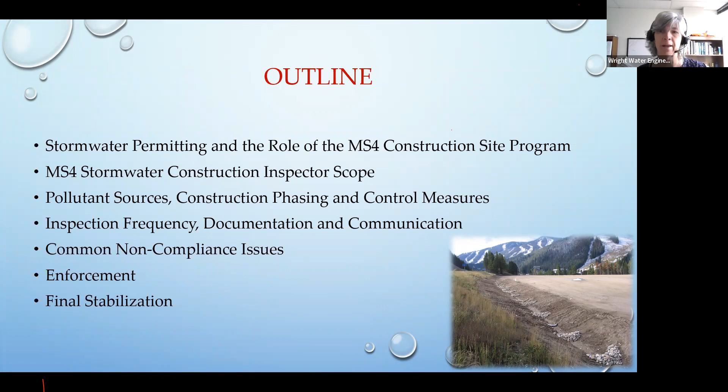I think I start with a quiz, and this is just a reminder again of what is, let me just make sure the poll was something I forgot to double check. Interesting. Okay, I did - it's so funny, the irony, right? I checked this last time and it worked just fine, and now this one is not correct.

So we can use the chat box on this. Who can tell me what are some of the scopes, the requirements, or the scope of the construction inspection oversight for the MS4 inspector? I just kind of mentioned a few things just a few minutes ago, so what are some other things?

Yeah, well, acre or more if to get the permit. But yeah, one of the pieces is that you have to evaluate all the pollutant sources, including trash. And then you have to evaluate the BMPs or the control measures.

Are they adequate? Was there a failure to implement them? Do any of them need routine inspections? I mean, routine and maintenance. And then proper installation, absolutely.

And then that last element is whether there are any discharges offsite of pollutants, right? Because you're allowed to have offsite discharges of stormwater - that's what your permits are allowing you to do. But what you're not allowed to do is have discharges with pollutants in them.

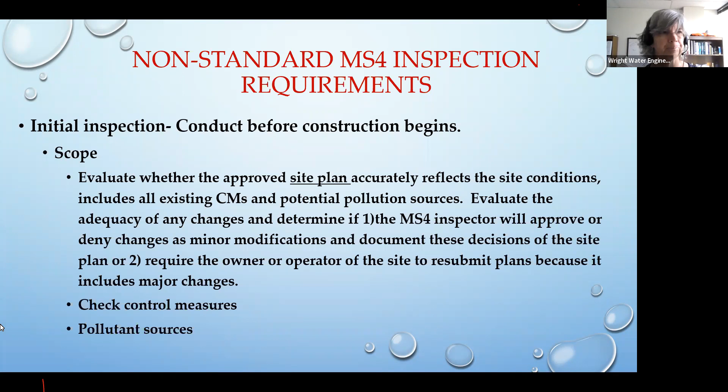Okay, back to the indicator inspections. I think use these with caution. I don't think it's terrible to use them, but I do find that people get very confused about indicator inspections. Typically, what we use them for is when we do compliance follow-up - we're kind of just focusing only on the action items that were identified in the routine inspection. So that would be considered an indicator - you wouldn't be out there re-evaluating all of the pollutant sources.

You'll want to make sure that if you're using indicator, and if you're just going out every 2 weeks but you're actually doing routine, that's fine. It's this indicator that's possibly you're not evaluating all of the site.

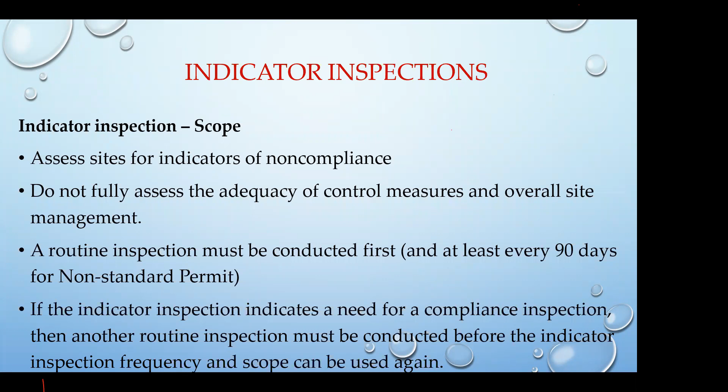I think that's a great idea too, because that's a big thing for regulators. They have to respond, not only us as representing MS4s, but also the state and EPA. They have to be responsive to public complaints. So it's really important that you can mark that differently, so that if it comes up, you can look back through, document what the complaint was, document what your observations were, and whatever corrective actions might have needed to occur after your site visit. So I think that's a really good one to point out.

And as I mentioned before we move off the indicator inspections, they don't necessarily fully assess the adequacy of all the control measures and pollutants and site management. That's why they're considered a snapshot, a very quick inspection, and why you got to be careful using them.

You can use them if you need to, but based on my experience, I almost always find at least one corrective action item at an active construction site. So it's going to push you right into a routine inspection again. So my advice is be very, very careful if you're using these, because it's very easy to be out of compliance with the permit if you're not careful.

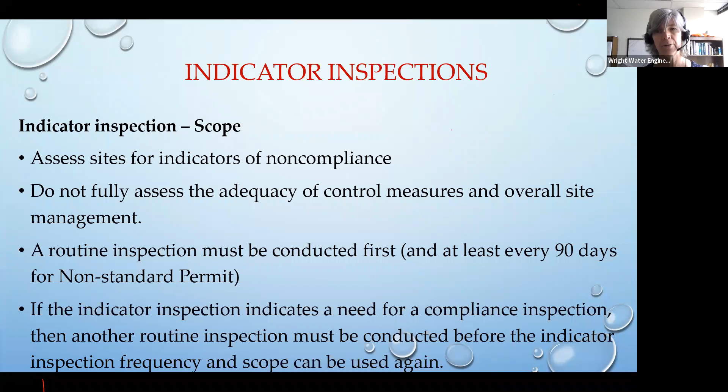So this is the other reduced inspection frequency that can happen. And as Glenda mentioned, it's really good to have your form so you can mark off the different things, like maybe construction is completed and you're waiting for vegetation reestablishment, or the site's inactive. It also can be if the site is part of what they call the Stormwater Management System Administrator Program, or CSEP. Those contractors can actually go to a reduced inspection frequency.

Now, I'm going to say this, though, that's very important. You are not required as a municipality to use a reduced inspection frequency. In fact, for most of the municipalities I've worked with, they do not do this. But the state, because these folks are part of a state-run program where the state does more oversight, is saying they can go to a reduced inspection frequency. So that's just something to think about for your municipality.

Again, you don't have to do it, but if for any reason you happen to miss an inspection on a 45-day frequency and you're evaluating whether you're out of compliance with your permit, you might want to make sure that contractor is not part of this program, because if they are, you really wouldn't be out of compliance. You just need to mark and indicate on your inspection report that they are part of the CSEP program.

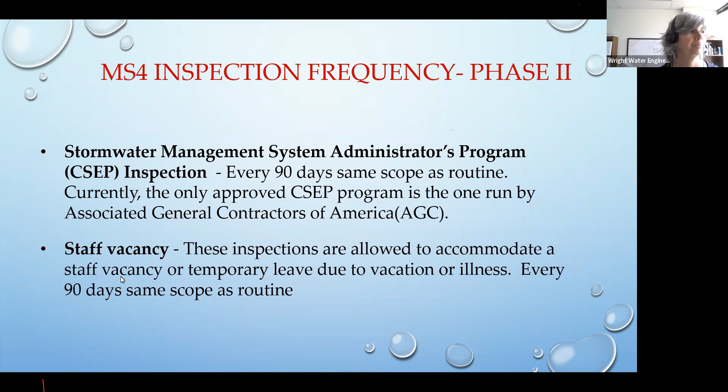So I'm wondering out there what your program's frequency is. Are you using monthly inspections? That's what I'm finding most common, is most municipalities, even though it's 45 days, they're using monthly just so they don't miss that mark. Or there are a few folks that are using 2-week frequency.

I know one municipality I'm working with right now, they typically use a month frequency for their routine inspections, but for their CIP projects, they actually use every 2 weeks with a full-blown inspection. So I'm wondering what everybody else is using out there.

30 to 45 days, depending on site. That's the other good thing, is that flexibility, right? If you have sites that are not in good shape, every 7 days is great. That's because you're a qualified local program. Although that's interesting, you probably don't have to do that. So that's really frequent, that's great.

30 days, I think, based on my experience in this class, has been the most common, 25 to 30. So if you are a municipality or school system trying to develop your program, I would say there's a reason people pick 30 days or more frequent versus the 45.

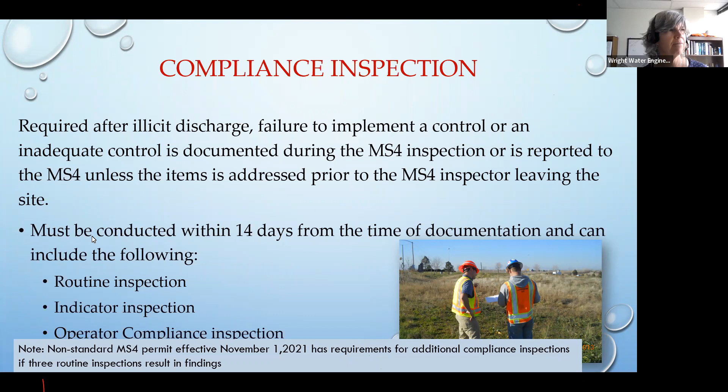What's hard about that is if you have 3 of these apparently in a row with your inspections under the non-standard permit, you actually have to move to a 14-day frequency on your inspections. Let me see if I have this somewhere - I feel like it's here, but not here. But we'll go back to that. I have a whole slide on it, but I'd love to get some thoughts from other people too - just make sure you're all aware of that, because that would change things for those of you doing 30-day inspections.

That would make a lot of your sites probably become 14-day inspections, although it sounds like not for very long, and we'll get into the details of when you can switch back to your normal routine schedule. But before we do, let's talk about operator compliance inspections.

You can either do your compliance follow-up inspections in person, or you can ask the contractor or operator to send photos to you. Some people use forms for this. It works really well if you're in a community that has a lot of contractors who hire third-party vendors who are experienced, have software like Adobe, and are able to take photos with iPads, Surface Pro, or tablets and put them into this type of form, or at least manually input the pictures into the form.

Where it doesn't work very well is when you're dealing with custom home builders or other contractors where computer things just aren't their thing. So they're more likely to just send you photos. That's fine, but you have to have a way to document it in your system. That report has to include the photos, the contractor's name, and a date of when things were fixed. Just be aware of this, and you may need to have multiple options in your municipality.

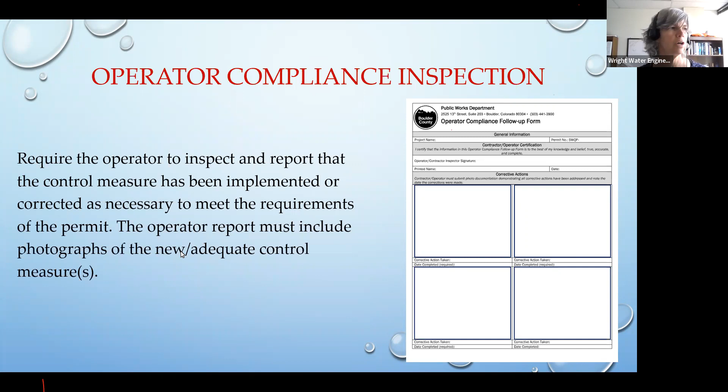Okay, here's that slide I promised you for the non-standard permit. If there are 3 consecutive routine inspections that require compliance inspections - meaning there were either inadequate control measures, failure to implement, or a discharge - if you have 3 of those in a row, then you have to go to a 14-day inspection frequency. The interesting part, which makes this seem more palatable, is that you only have to do that 14-day frequency until the site no longer has an illicit discharge, which maybe it never had to begin with - you don't want to have an illicit discharge.

Of course, you wouldn't let that keep happening, or that the failure to implement the control measure is resulting in an increase of discharge of pollutants. And this is different, right? This is an actual increase in discharge, not potential. And then the third caveat, as long as the site is no longer having inadequate control measures resulting in an increased discharge of pollutant.

So this doesn't, to me... this is where I think we'd want clarification, although I don't know, maybe you don't want clarification. To me, this says that unless the site is actually discharging and having an increased discharge of pollutant, you can get out of that 14-day frequency pretty quickly. And honestly, I think a lot of the compliance follow-up items we're looking at often aren't an actual discharge, nor are they causing an increased discharge of pollutant. They're just a potential. So I don't know what anybody else's thought is on this, I'm kind of curious.

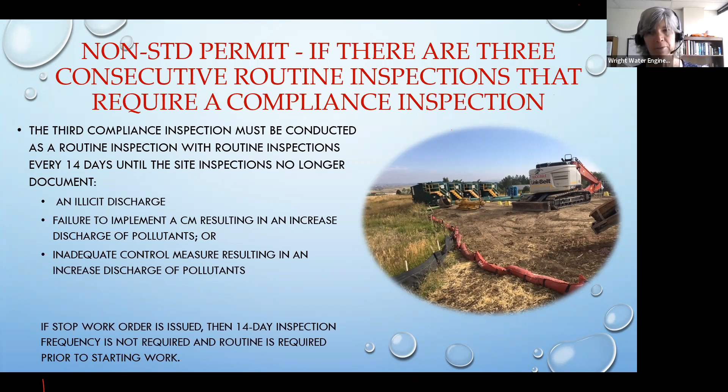But do know this is out there. And the reason I think this is because of the stop work language they start talking about. So to me, I think they're trying to say as enforcement occurs, you're going out there every 14 days, which most of us are going out way more frequently than that if we're in enforcement.

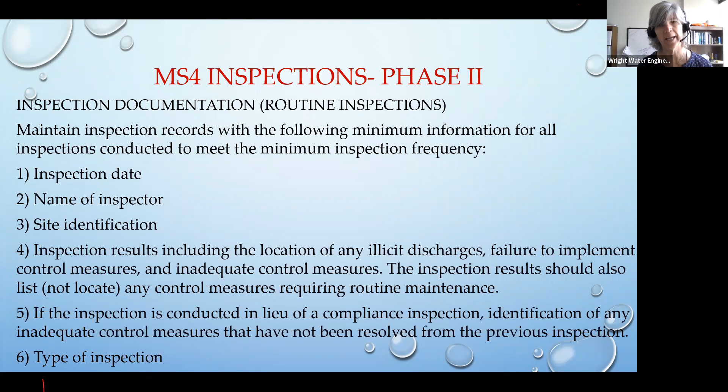And then the type of inspection, again, whether it's routine, indicator, or reduced. And I like what Glenda said, as well as providing maybe a little more detail, especially for reduced, because there are many different reasons why it could be reduced. And also, I think someone else said, if it's a citizen complaint, it's really good to be able to indicate that type of inspection.

So this is just an example—I think I happen to have Castle Pines on here. In this one, we mark down the project name, the address. We actually do list the CDPS permit number, which is that number from the state, under the Colorado Discharge Permit System. We put in that number because we just want to make sure that they had that permit.

You could also just have this as a checkbox as something you review as part of your review. You also aren't required to have it, so this is not a required item. It's more of just if your municipality or organization believes that they want to check if there is coverage for permits that are required to have coverage under that system, that they have it. But again, that's kind of an optional thing.

We have the date of inspection, we have the project contractor information. In the city of Castle Pines, as well as Douglas County, and I believe Parker, we have site managers. So that's written in there—who that person is and their contact information.

And then you want to put in some kind of frequency—you can call it frequency also. As Glenda was talking about for routine, we have that here, but then for the reduced, we have a circle to indicate which one it's supposed to be for, whether it's an inactive site, part of the stormwater management program, or a staff vacancy.

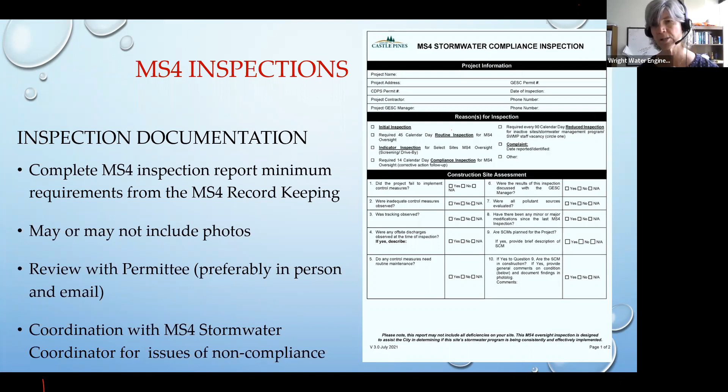It's much better to have those conversations early in the game than to all of a sudden at the 11th hour when you want to issue a stop work order have that conversation. Again, if you're the MS4 stormwater coordinator, then you know who you need to be talking to, but this would really be for inspectors that are not holding that position. You just want to make sure you're communicating within your organization too about some of these sites.

This is just a blow up of what we already talked about, making sure that you do mark the frequencies. As someone mentioned, complaint - we have that marked off here too, because that's really important to identify. And we actually have the other category too. There are times that you might want to use the other.

For example, if you are aware of an inspection happening at a nearby site by a regulatory agency, maybe you want to go out to that site that they're going to be inspecting, and maybe even some of the sites nearby. For whatever reason, you can always mark other and then put in here why you went out.

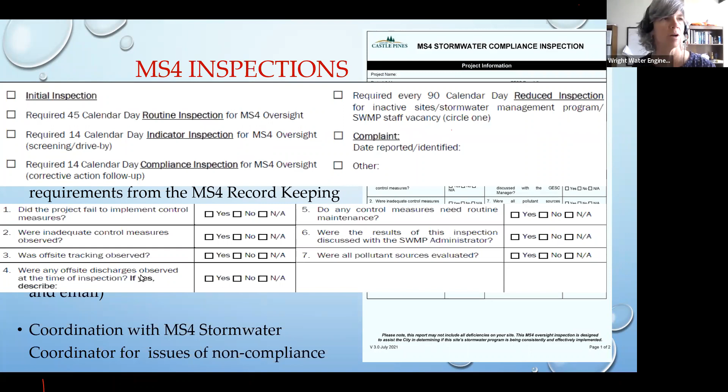This is also a blow up of just that having checkbox for failure to implement, inadequate. This one happens to have offsite tracking, but you don't have to have that per the permit - that was just added to this one because it was important for this group. And then were offsite discharges observed - that's required, right? That's that illicit discharge, they're calling it, even though it's more of an offsite discharge.

And then routine maintenance. And then here, this is optional, and this could be GESC manager or SWMP administrator - were the results discussed? Sometimes it's helpful to know that, because it's helpful to know, like, hey, did you meet with them on site and talk to them about this?

And if you continue to not have a response, I think it shows that you had these verbal communications that occurred. I highly recommend for everyone, if you don't have this on your form, to put in: were all the pollutant sources evaluated? Because remember, that's a requirement of the permit. But there might be times where the answer is no.

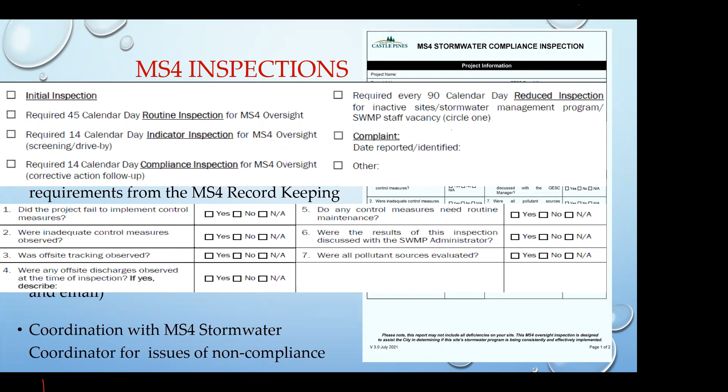So when do you think we would ever check off that we didn't evaluate all of the pollutant sources? Can anybody think of some times they might check that? If you're doing a compliance follow-up inspection and only looking at those items that were out of compliance at the last inspection - yeah, absolutely. So if you're doing a compliance follow-up inspection and not doing a routine of the whole entire site - maybe that's your program, but if your program only really requires you to look at the items that were outstanding or in non-compliance during your last inspection, then you're going to check off no. You might want to even put in a little description: this was a follow-up inspection, only outstanding items were evaluated.

The other one someone mentioned is snow cover. If it's covered in snow, you can't possibly be evaluating all the pollutant sources, so it's okay to check no. Sometimes we get a mindset that we have to always be checking yes for these type of questions, and there are times where the answer is no - it's snow covered, snow obstructed, maybe too muddy and you couldn't get in. To get into the site you would have had to drag out a bunch of mud with you, and maybe it just wasn't very feasible to walk it. So whatever it is, make sure you just document it. This is the big take-home from this class: communication and documentation. So make sure you document it.

The other thing is, if you happen to have a complaint and the complaint was really centered around some specific item, you might only go out and look at that specific item. So all good reasons for not evaluating all of the pollutant sources. Oh, the other one is if you're doing an indicator inspection - if you checked off that it's an indicator inspection, then you would also want to check off no, not all pollutants were evaluated. And that's okay, because it doesn't require you to evaluate all of them if you're doing that type of inspection.

So speaking of communication, we're going to dive into this for a couple of slides. As I mentioned, big take-homes from this class are communication and documentation. And the communication is not just with the permittees, although most of these slides are going to be about that - it's also about communicating with your group and within your organization. I mentioned on the last slide that if you're starting to have a problem with a site, especially if you're an inspector that has an MS4 stormwater coordinator as your supervisor, you're going to want to make sure to give them the heads up.

Or also if it's a CIP project, you're going to want to reach out to the CIP managers and say, I'm really struggling with this project, we don't seem to be understanding what compliance is - is there a way we can have a meeting together, either just internally first and then with the contractor, or how do you want to handle this? Because they play a really big role in those CIP projects. And again, you just don't want to wait till the last minute and say, you know what, I want to stop work on this project, and then have the CIP manager or even the MS4 coordinator say, well, I had no idea you were even having problems with it. So you want to have those communications early in the process.

Also, when you're working with the contractor, you want to be very careful about directing the contractor. This is super easy for all of us to do. We really want to be careful about this - sometimes there are times you can direct the contractor, especially if they really don't seem to understand stormwater compliance, but you want to be careful. Because really your role is to identify non-compliance to them, and they need to then respond and fix it. Your role is not necessarily to create a plan for their project that would meet the expectations.

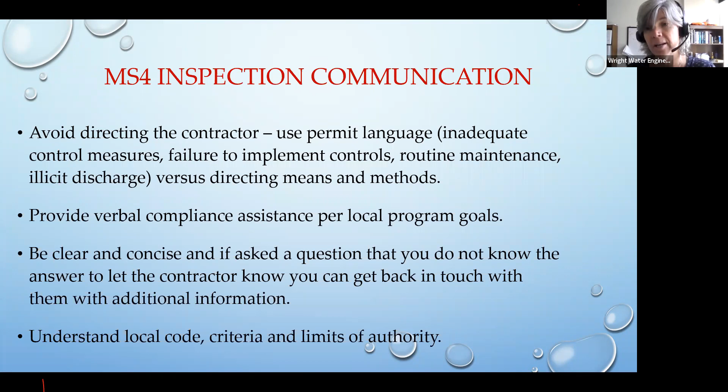We all try to be pleasant, though we have days where we're more pleasant than others. It's hard because some contractors might push your buttons, especially if you've had a lot of dealings with them. You have to remember that this is your job and you are a professional, and you expect to be treated like a professional too by the contractor.

You can say something like, I feel like this conversation is heading in a direction where it's no longer a professional conversation, and I think we need to table it and come back when we can both speak to this in a professional manner.

What you don't want to do is risk your job. It gets risky when you start being manipulated by the contractor and react in a way you wouldn't normally. It's okay to get a tiny bit bristly, but you have to be careful not to go somewhere that doesn't show your professional side. Keep that in mind.

If you feel like you need to leave, you can always do that. If you're in the middle of a conversation and can see it's not going anywhere, I highly recommend tabling that part of the conversation if you have other items to talk about.

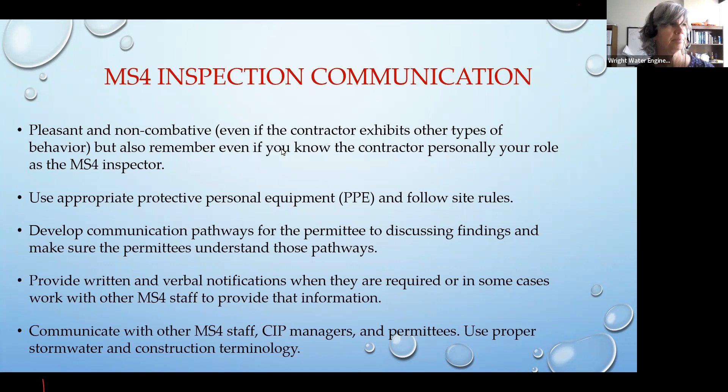This is Steve Matakowski from Mile High Flood District. This clip is really short—we had two clips, one used for the CIP training, but this one gets into communication. Make sure you're communicating, because agencies like Mile High could come into your municipality and be working, and they just want that communication. Some of them really want to walk the site with you. I know it's not always easy and you don't have a lot of time, but I recommend for permittees that want to walk the site with you, if you're easily able to coordinate, give them that opportunity, especially the first couple times, because it can be really helpful for them to understand what you're looking for out there.

Welcome, I'm here with Steve Matakowski with Urban Drainage at Sanderson Gulch Project to talk about stormwater compliance during construction. This class, given through the Colorado Stormwater Council, is geared towards our MS4 inspectors. I'm wondering what advice you might give them when inspecting an urban drainage project, what things to make sure are in place, and some of the communication they might want to have with the urban drainage folks as well as contractors, and how your program is set up.

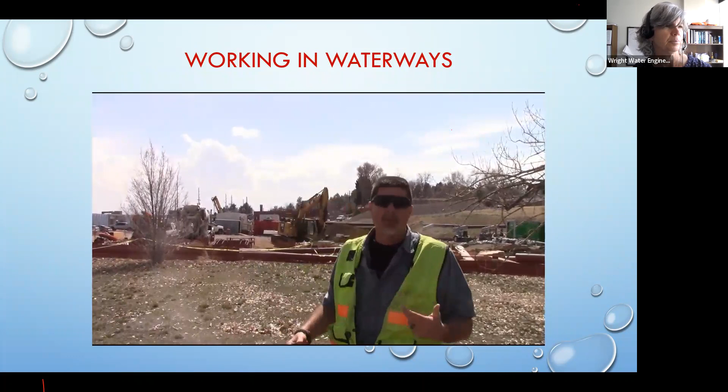I would say first and foremost, be gentle with us. Really, communication's a big part of what we try to do—effective communication, good communication, developing really good partnerships. We look at those MS4s as our partners in this. So early communication, making sure communication happens often, appropriate site visits, and really helping us stay ahead of whatever the needs are from that MS4 compliance portion of the project would be really important. We are always committed to effective erosion control and trying to protect the environment as much as possible. Obviously on a big project site there's disturbance, but we want to do our best to minimize those impacts.

So again, I think Steve really echoes what a lot of people feel, although there are some contractors that aren't trying as hard—this is before Urban Drainage became rebranded as Mile High. Especially when you have other governmental or quasi-governmental projects come through—I just worked on a big water line, and they want to try to be on top of it, but their contractor wasn't always. This is where we made sure I wasn't having a conversation just with the contractor, I had it also with the water line company. It's really important to do that communication, and I'd say early in the process, just like Steve was saying, don't wait until even the notice of violation—let's talk about this before we get to a stop work order. And if we get to the stop work order, if that's where it has to go, great, but let's communicate to make sure everybody's aware that's where it's headed.

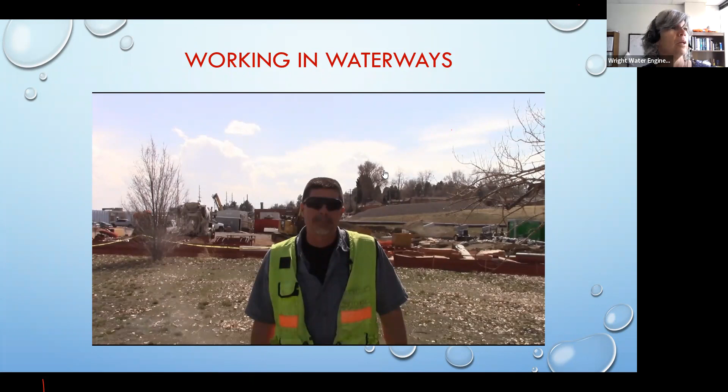I also have an inspector video, and this is a little cheesy for some of us, but the idea here is just to make sure when you're doing those initial inspections or pre-construction that you are communicating effectively to the permittee. This is why I'm a big proponent of these initial inspections, and a proponent of MS4 giving a spiel, talking about their expectations and introducing themselves. Because if you come out of left field and no one knows who you are, you're not going to get nearly as much leverage as you would if you set the stage to begin with.

Hi, nice to meet you. I will be your MS4 inspector during this construction project. I will be coming on site for a routine stormwater inspection at least every 45 days. Are you the qualified stormwater manager for this project?

Great. What I would like to do now is go over the initial inspection kickoff agenda. This will cover what you can expect from me and what I expect from you. Like I said, I will be coming out on site at least every 45 days for a routine inspection. During my routine inspection, if I find the site out of compliance, I will ask you to address the findings and respond with an operator compliance follow-up form. If I do not receive an operator compliance form within the allotted time frame, I will have to come back on site for a compliance follow-up inspection. Does all that make sense?

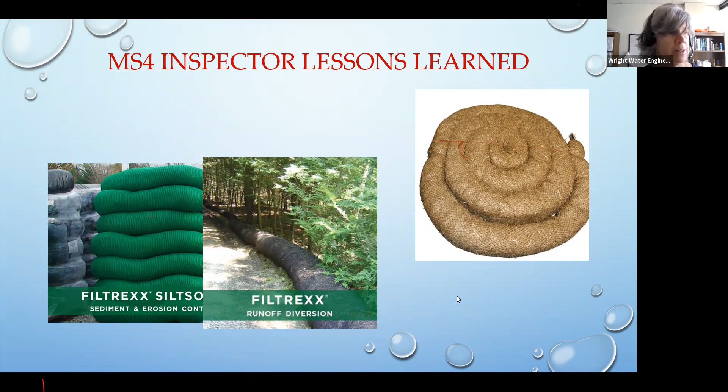All right, so documentation. As I mentioned in my story, and I think in Glenda's also, you need to have that documentation to back up what you're saying. So thank goodness I had put in the inspection report that they needed to verify which product they were using. I did also put, though, if it was a compost log, to use the X staking, but that's okay. That's what still saved me.

Had I not documented that verbal conversation, it might have been harder in the end to defuse what was happening. So I highly recommend documenting as much as possible, even some of the verbal communications. For example, those minor modifications.

You know, if the contractor says, hey, I want to use a Dandy product instead of the inlet protection I said I was going to use, and you say, oh, that's fine, go ahead and put that in the notes section or comments section in your software, wherever is appropriate for your program. But mark down, on May 18th, gave permission to use Dandy products for inlets. That way it's documented very nicely.

Or had a conversation with the contractor explaining they were not allowed to use Dandy products, because that might be the case too. So whatever the outcome is, go ahead and document it. The notes section is a great place in your inspection reports.

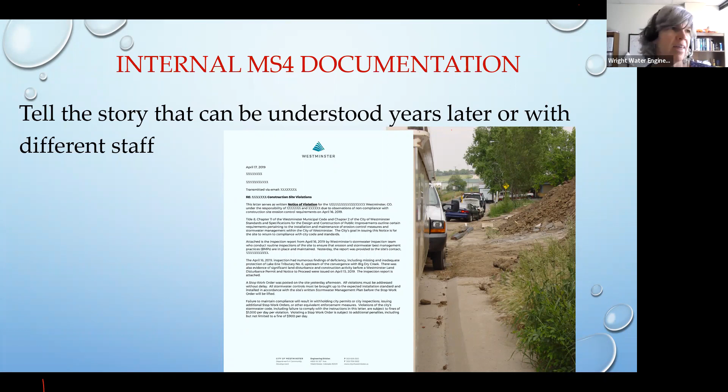All right, if a contractor asks how much silt fence they need to order to be in compliance, you should - and actually this is a true story, folks - what do you think there? I'm not gonna read all of them, but I'll let you read through them and pick.

This is a great time to show you this feature. Some of you have Zoom, where on your toolbar there's an annotate button with a little pencil icon. Some of you might have it as a view button - if you drop it down you get your annotate option, which looks like a little pencil, and you're able to draw. So this is me up here. We're gonna use this in just a little bit too. I can't draw very well with it, but you can also put text in.

Yeah. I know, I agree with you, Martha.

Sometimes I want to do A, right? You just want to be like - and the thing is, this person was actually, it wasn't a contractor, it was an HOA, which you gotta remember. And even with contractors, sometimes you think someone's trying to be a smart aleck, and then you realize no, they're actually being super serious. Like they really just don't understand the process. So you got to be respectful.

And this is what we did. We said, look, you're going to have to go back and either get your vendor - though most of the time the vendors aren't going to come out and measure it, unless you're hiring a third party and the installer comes out to measure it. Or you're going to have to go back to the plan set and have them measure it out, or look for a scale bar and measure it out yourself. But this is a true story - sometimes you can't make these things up.

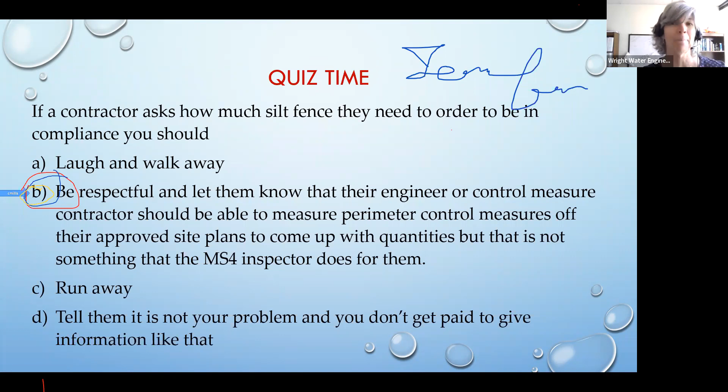So yeah, good job everybody, you want to be respectful. It took me a minute, actually - I was sort of like, are they serious? And they were very serious. They just had no idea, they really didn't know where to start. So just remember, sometimes people really are trying, but they just don't understand the process, or they don't even know where to begin.

I worked with a municipality that had issues with a site, and they ended up telling the site - because the contractor honestly didn't understand control measures, and they were always installing their own without understanding how, and didn't understand the expectations for compliance - that municipality required, and we can all do this, that they identify a qualified stormwater manager, or whatever your program calls it. That person is supposed to be knowledgeable in stormwater practices, and if that person doesn't exist, you can require they hire a third party that meets those requirements. That's what this municipality did, and that contractor ended up having to hire a third party to come out and do the stormwater inspections and installs.

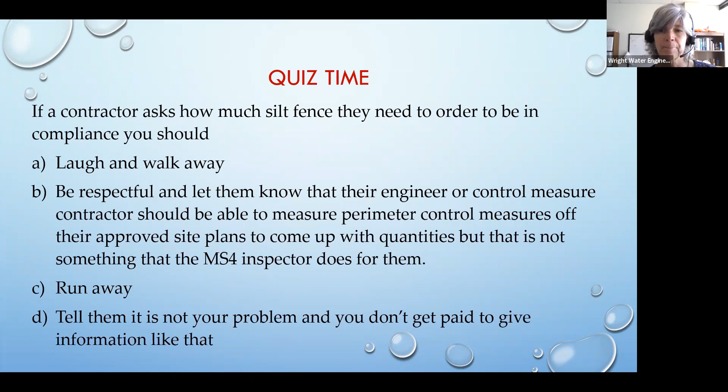All right, yay, fun game time. We're gonna go ahead and do the game time, and then we'll take a break after that. So this is my little Jeopardy - I actually just created one for the CIP class, and I think they're super fun. So let me go ahead and run this.

And how we're gonna run it is, if we were in person we might do teams - that's how I initially was doing it. But since we're not, what we're gonna do is I'll pick someone to lead us off, and after that person picks the category, the first person to answer - it can be in the chat or unmuting - the first person to answer, they'll pick the next one.

So the categories that we have today are control measure FAQs, inspection permit knowledge, regulatory requirements, challenging situations, which is kind of tough because it's often a little bit of a long answer, but that's okay. If we even get close, you get it right. Enforcement 101. All right, why don't we go with Andrew Rippey, because he's got an A and he's one of the first ones listed in my participant list.

Do you want to pick one here? Sure, let's do inspection permit knowledge for 200. All right. Name 3 items that must be assessed as part of the routine inspection. And that's for anybody to answer.

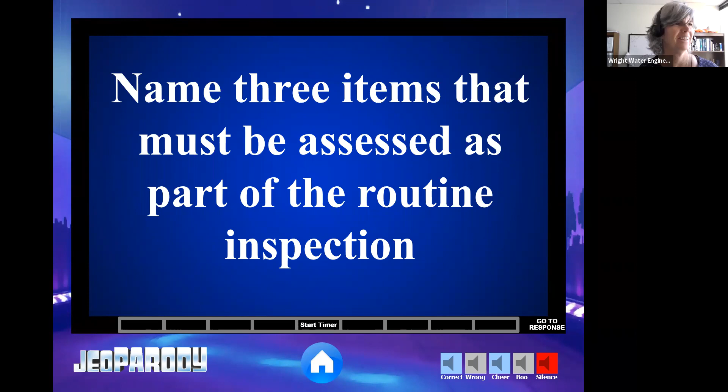This is Glenda. So all pollutant sources, all illicit or offsite discharge locations, and oh geez, now I'm drawing a blank. What about CMs? Oh yeah, and installation of control measures. Yeah, right, absolutely. Brain cramp. I know, that happens to me sometimes when I'm teaching too. I'm like, I knew what I was going to say and I've totally forgotten. But yes,

So you have to, the bottom two are the first two that Glenda started with, the illicit discharge and evaluating all pollutant sources. And then with the control measures, there's actually a couple different items within there. You have to identify if there's a failure to implement, inadequate, or if there's routine maintenance. And even though routine maintenance doesn't trigger a compliance follow-up, it is still required that you identify routine maintenance during your inspection. So good job.

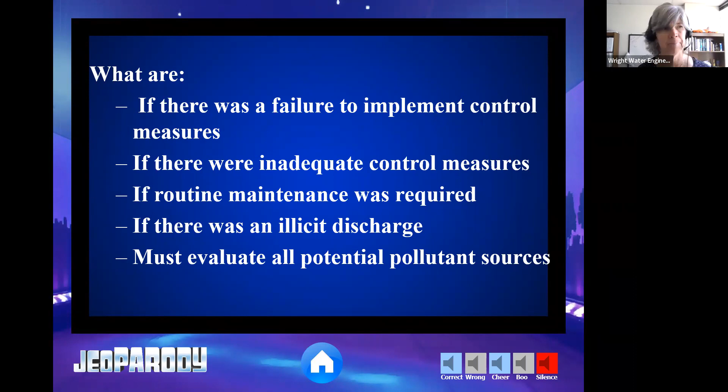All right, Glenda, you want to pick the next one? How about control measure FAQs for 300? Maximum upgradient disturbed area per every 100 foot of sediment control without another control measure in place. So this is the drainage, upgradient drainage draining to the perimeter control. What's the maximum allowed? Anybody know? So 1/4 acre.

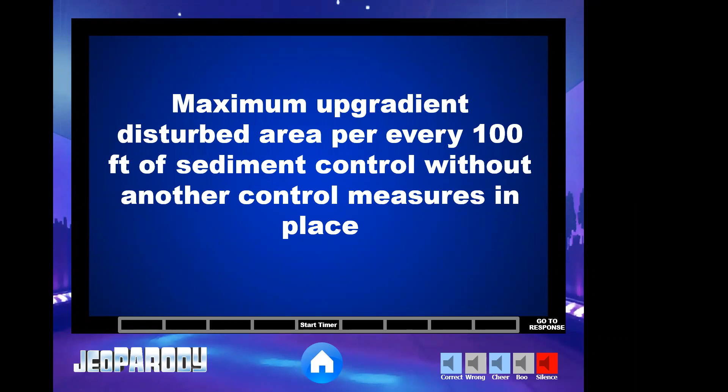1/4 acre, yay. All right, Ashley, if I can get back. What do you want to pick there? Let's do regulatory requirements for 500. All right, going for the big bucks.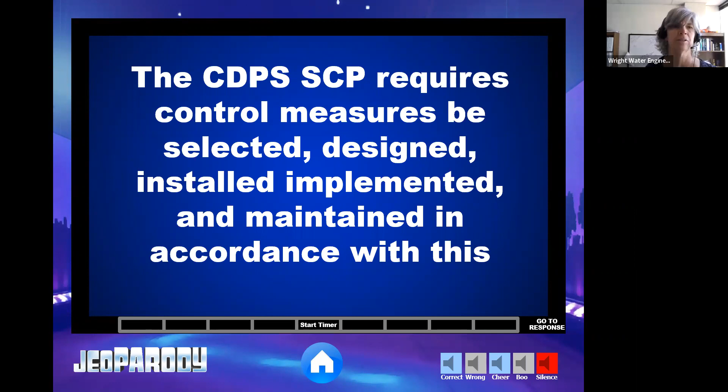So the SCP requires control measures to be selected, designed, installed, implemented, and maintained in accordance with this. It's my favorite phrase. Yeah, the site plan is true too. So what are good engineering, hydrological, and pollution prevention practices? Yes, that's the answer we're looking for. I do agree with everyone that had SWMP and site plan. The SWMP itself has to be designed with good engineering, hydrologic, and pollution prevention practices.

So just remember, if you as an inspector have a contractor, and I've definitely had this happen, show me where it says I have to do this. You can say, it says it has to be designed with good engineering, hydrologic, and pollution prevention practices. And what I'm seeing here does not meet that criteria. It's as easy as that.

So I know the first time that happened to me, I was scrambling. I was like, oh my gosh, I don't know that. So I had a contractor who seeded, broadcast seeded, and did not put any kind of cover on it. And they were like, show me where it says I have to put a cover. And I was like, oh my gosh, where would I find that it specifically within the MS4 regulation says that? So I was like, you know what, it's standard practice, right? And so I use this good engineering, hydrologic, and pollution prevention practices. So very helpful to use.

I agree with everyone that had site plan and SWMP. Those are also designed with this, but all the control measures, as well as the site plan, as well as the SWMP, all have to meet this requirement. All right, and I'm so sorry, because now I've forgotten who said that. It was Glenda. Okay, great. Glenda, you want to pick again?

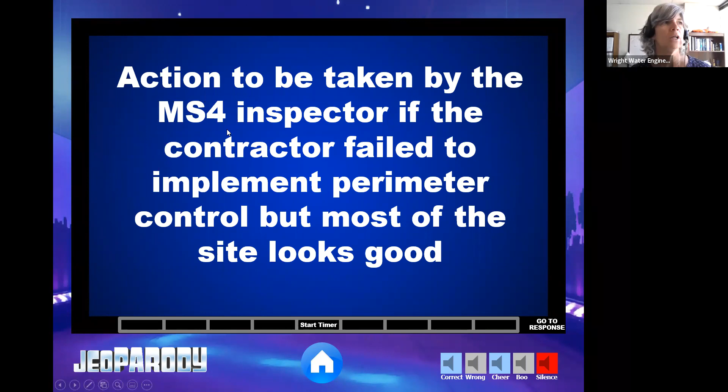They failed the inspection. Yeah, they do. You know, look, I had an inspector once that was one of our staff here at Wright Water, and they're like, well, it looks so good, you know, and I didn't want to be discouraging. And I was like, no, you cannot, they failed. I mean, and you can absolutely in your inspection report, put a note that most of the rest of the site looked really good, but you still have to document that they failed on that aspect.

And I often do tell a site that looks really good and they just have one little issue. Hey, overall, the site looked really good. However, there is a deficiency, so I need you to fix that. It's going to be on the report. So that's absolutely right.

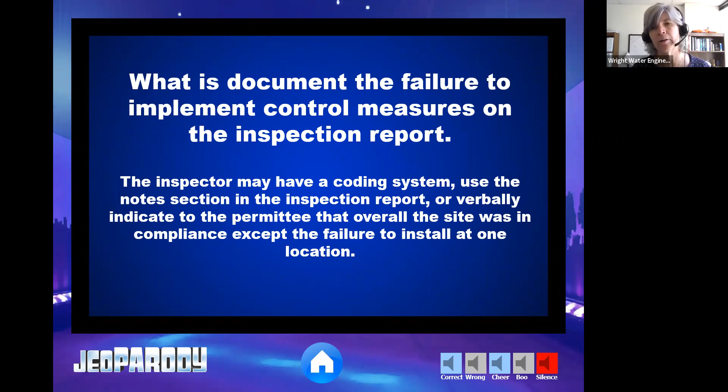All right, Joe, what do you want to pick? Enforcement 101 for 500.

All right, we're going for another big one. I can't remember this one either. Tool to ensure that permanent control measures are built per design. Oh, this one's actually kind of easy.

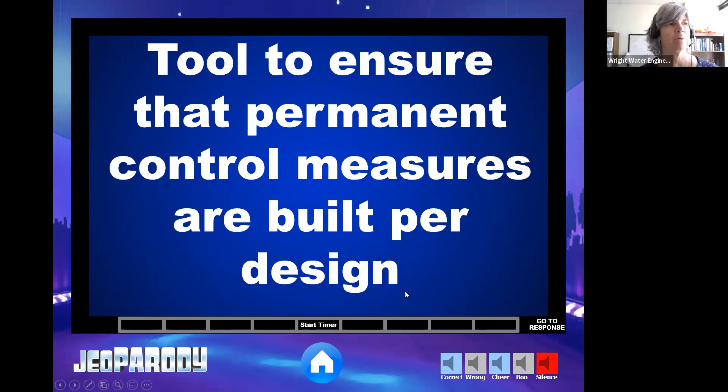What do we have to require now? It's a detail, and even more information than a typical detail. It's an as-built, right? So it's an as-built detail that shows what was built out there, and that then has to be compared to the original design plans. Some municipalities even require a statement that says this was built per the approved plan, or built per the approved plan with the exceptions listed below. The idea is that those exceptions hopefully were very minor.

This one's a little tricky, I have to decide if I'm going to keep this one in. We don't really talk about permanent water quality control measures in this class as much, but do know, as I mentioned last week when we were talking about sediment basins, that potentially we're going to be extending into detention basins later, you do need to make sure you are observing the construction of that permanent feature, at least marking notes in your inspection report if you don't have a separate checkbox item or form for that. That's something also to watch on this Phase 2 renewal, to see what language is going to be in the renewal process.

Let's see, I'll just pick somebody else since that one was a tough one. Sorry, I'm just looking for a name. How about Chancey?

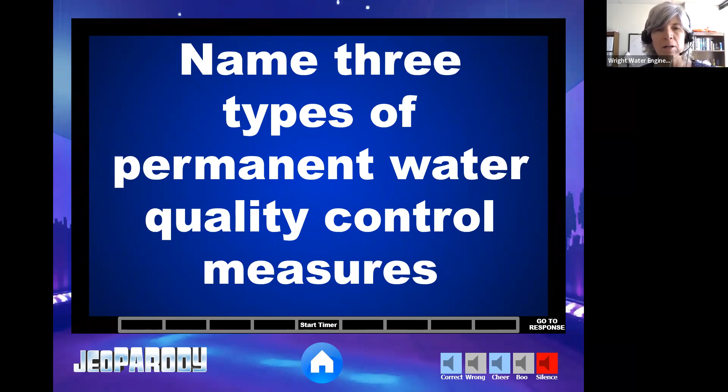It is really important as MS4 inspectors, even though you're doing mostly construction, that you need to be familiar with what our permanent stormwater control measures are. EDB, sand filter basin, and grass swale. Yeah, those are good ones. So we've got the EDB, most commonly used.

I will tell you, with the draft EDB that's out from Mile High Flood District, they are no longer recommending EDBs used for drainage areas that are less than 5 acres. So I think we're going to be seeing a lot more bioretention and infiltration type swales and stuff. Yeah, we've got rain garden, permeable pavers, StormTech, those underground stormwater facilities, absolutely.

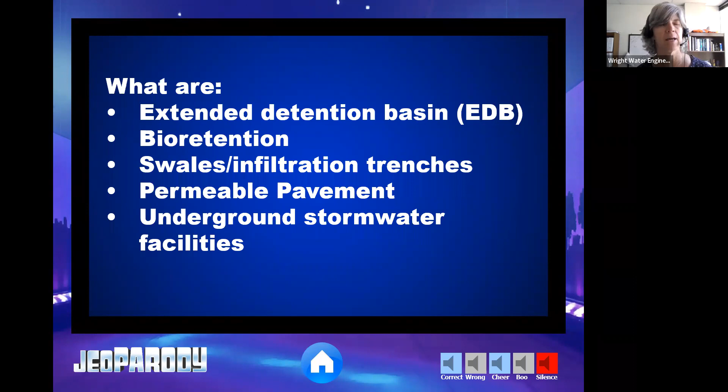All right, we're going to do one more. I think, Joe, I think that was you. Yeah.

Inspection permit knowledge for 500. All right, let's see what we put in here. Oh yeah, this one's kind of tough, although this is one that does affect for sure Castle Pines. 4 requirements for individual homes that were part of a bigger, common plan of development, to be excluded from MS4 oversight inspections per the MS4 permit. And I think this is also in the SCP permit, or portions of it are in the SCP, not all of it.

Yep, someone's got less than an acre. That's right, so that's one of them. How about? Sold to the homeowner. Yep, sold to the homeowner. Yep, taken out of the SWMP. So the permittee needs to mark down that that's been taken out.

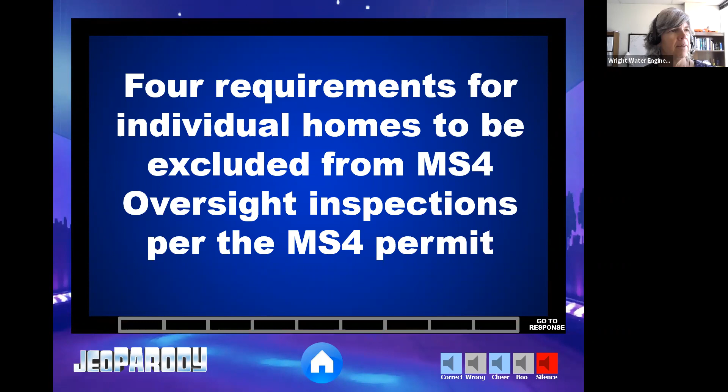So if that developer got a big overlot grading permit, in order for those lots to be taken out, either the overlot grading permit has to be in place still, or the builder has other lots that are still active and they still have a permit for the area. But someone needs to have an overall permit for the area still for where the lot is located. Now, if it's the last lot that's stabilized, then you could close out the whole permit, assuming everything outside of the lot has reached final stabilization.

Any questions on that?

I had a custom home builder who wanted to get out of their permit, but the problem is they weren't part of a common plan of development, so there was no residential over-lot permit being held by the builder, because it was only for one lot and it had to do with proximity to waterways—that's the only reason it was permitted. But I couldn't let them out. I said they either needed to hold on to the permit or it had to be transferred to the homeowner, because apparently the homeowner was doing all the landscaping. But in that case, you can't close it because there is no overlot type of permit overseeing that area in general.

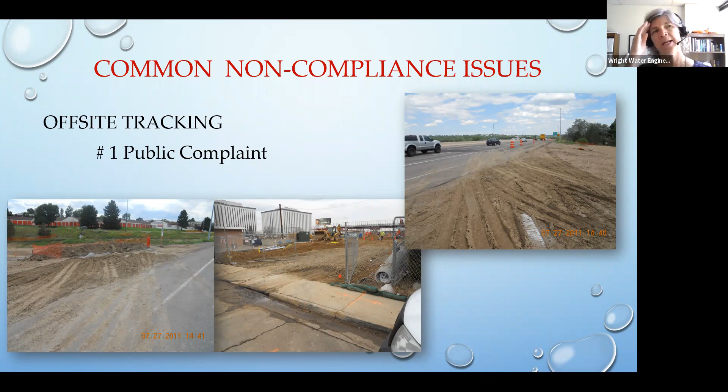So the number one complaint—yeah, no problem. And if you need to watch this recording afterwards, that's fine. Just let me know that you finished it, and I'll get you the exam, then we'll get you the certification. But yeah, go ahead and start marking these things up—you can do things like here, yep, got issues.

Great job. I would agree—on this top, upper right-hand side, we don't just have tracking, right? We've got tracking out to the pavement, and we've got no control measure in place. And can you just say 'I'm sweeping'? Is it okay to say, oh, I'm not going to put in any vehicle tracking control because I've just decided to sweep instead? No, no. And you hear that all the time—I just heard it the other day from someone, and I said, no, I'm sorry, that is not adequate.

So you must have some kind of tracking control pad. And in this case, there's no funneling onto that pad—it's sort of a free-for-all, anywhere you wanted to exit out of the site. So the number one complaint you'll get from the public is sediment tracking, especially when big clods of mud get tracked out. We haven't had rain in a long time, which isn't good for vegetation, but has made it easier for contractors working in the area. That's the number one complaint, so we need to make sure they have appropriate control measures in place.

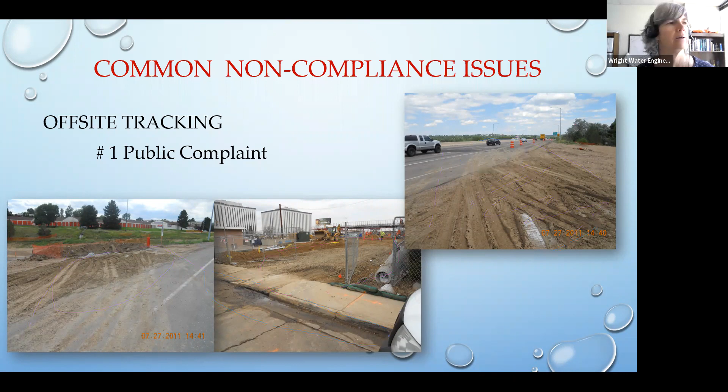Here's another non-compliant issue: inlet protection. What's going on in these photos? And perimeter control, sorry, I shouldn't leave that out. I just saw a silt fence like this lower right the other day. It's not a serious issue, but it can't function as designed the way it is, especially with a big gap like that. This is where you'll have to use your judgment: is it routine maintenance or is it inadequate in its current condition? Unless that bottom piece stays in place during a storm event, it's going to be inadequate. If the bottom is fine and it's just the very top, perhaps it could be routine maintenance.

I love this one. This was inlet protection—they had a modified detail so the concrete blocks were oriented this way. That piece was fine for this inlet, but then they placed this really muddy, awful manhole right above it that has all these pollutant sources on it.

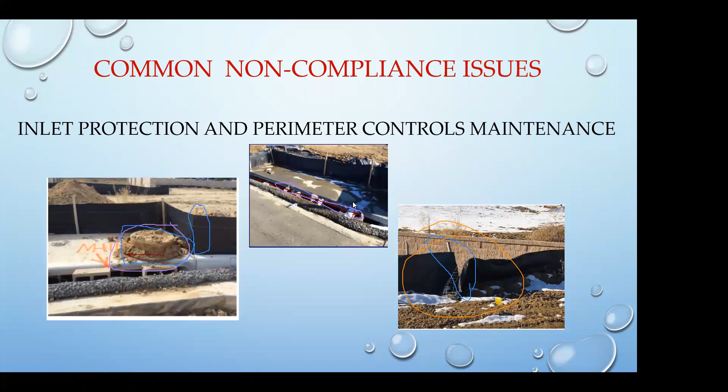This one's tough—they do have a gap here, but they do have silt fence. So I'm not sure about the middle. If the silt fence is behind the concrete, you'll have to evaluate this; perhaps it's adequate, but then I see pieces of rock and stuff in here that wouldn't be, right? I circled it because those are crushed—crushed cinder blocks, not crushed rock. Those don't look intact. I agree, crushed cinder blocks, no good. And with this rock sock, a lot of times what I see is it'll be broken, and that means the control measure itself is acting like the pollutant source—the crushed concrete blocks, any rock, if this were to break.

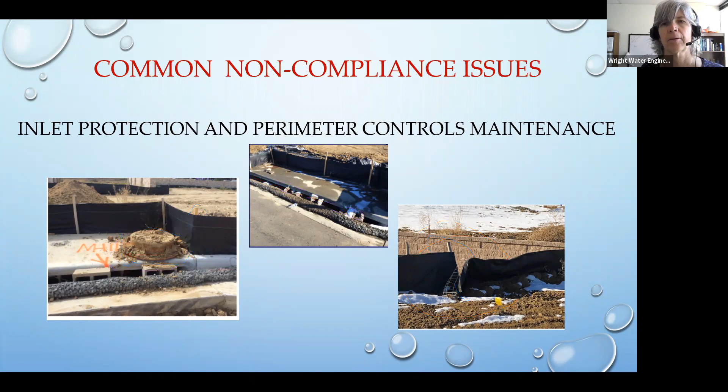Okay, stockpiles, spoil piles. Some of these might be okay, some might not be. I think the two bottom pictures really emphasize knowing your program's requirements. Some municipalities require control measures around the entire stockpile; I think it should only be on the down gradient side. Sometimes requirements aren't worded well and seem to indicate it has to be around the entire pile, but really I think it's the down gradient side—though other programs say if it's in close proximity to a perimeter control, it may not need controls around the pile. So know your program's requirements, and make sure you look at the drainage. If the drainage is towards us in this lower left-hand picture, we may need additional controls there.

This is really telling—this upper right-hand side, we don't have any controls at all. This is just a mess, and it's interacting with water and moving, being transported. Even though there's silt fence way back here, that's not going to be adequate. And here, we've got great perimeter controls on this side—what do we have on the other side? This is where, as an inspector, you need to go look, because if they have a trench on the other side, it's possible they're fine. The other thing I'd recommend as an added layer of protection is maybe some curb socks here, although that can be tough when they're driving in that area, but they could hopefully avoid them.

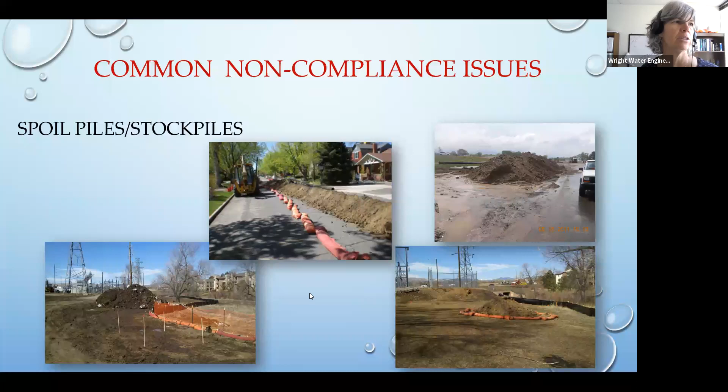All right, here we've got waste management, concrete.

Yeah, I love that one, right? Everyone jumped to that one because it's just so awful where they've got this washout in the middle of the road, and it's not even constructed properly. Plus, now they've got a pile in the road and waste. That's really bad. I'm a big proponent of these prefabricated mobile washouts, but you still need some controls around them.

They can be messy and shouldn't leak, but often things can be spilled, so it's a good idea to extend the silt fence or whatever kind of perimeter control. And this lower right-hand side, this is something I see all the time where the concrete gets dumped not inside the excavated area, but actually on the lip of it where it can run down.

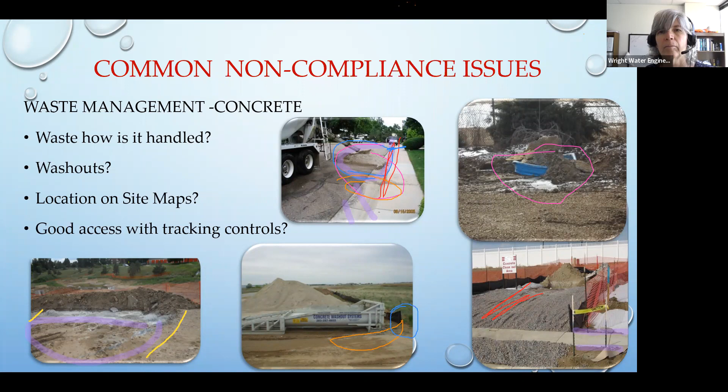Waste material, the one in the lower left, I actually think was a good picture. They had very clear signage for all their different dumpsters. It was really well done. I think I mentioned this last week—it might have been on our control measure slide—that this was over by Union Station when they were expanding it. It was a very clean site.

The two that really have a lot of issues here are over on the right-hand side, probably the most issues. And Jake, I'm trying to see what you're— maybe something to pull it. It's a smiley face. Oh, a smiley face. I love it. Yeah, they did a good job.

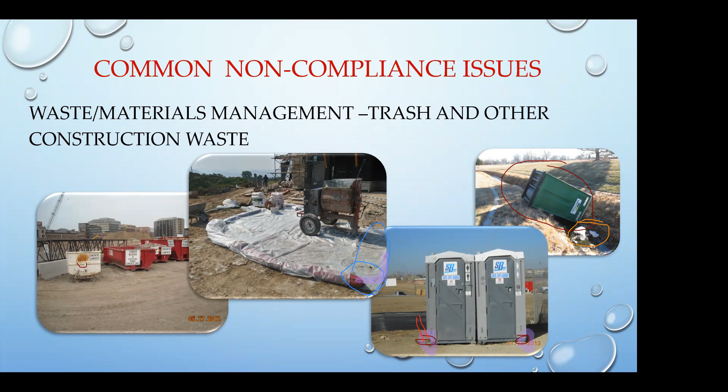Please do try to remember that. It's really hard for us as inspectors to remember to compliment the good sites, but we need to try to do that because it makes our jobs much easier, right? And it's wonderful to see sites that are really overall doing well, so remember to give them a thumbs up or a smiley face.

This middle picture, this was a custom home builder that I have been struggling with, and actually I have a couple more that are worse. This one came up with this idea of using the big reds with the plastic, and I was fine with it. I agree the plastic though should really go over the whole entire big red here. And the flow, which you can't really tell very easily from this photo, is really towards us, so it wasn't going to drain back towards the house.

But it's just a nice way to have some kind of containment for your stucco washout areas. I do find that maybe doing some more public education or targeted education for stucco contractors would be a good idea, because a lot of these folks just aren't used to putting their mixing stations in a contained area. And this was pretty cheap to construct—this person already had the big reds on site, they had plastic, it really was not hard. I've also seen people do this with compacted earth and berms with the plastic too, and it can be very effective.

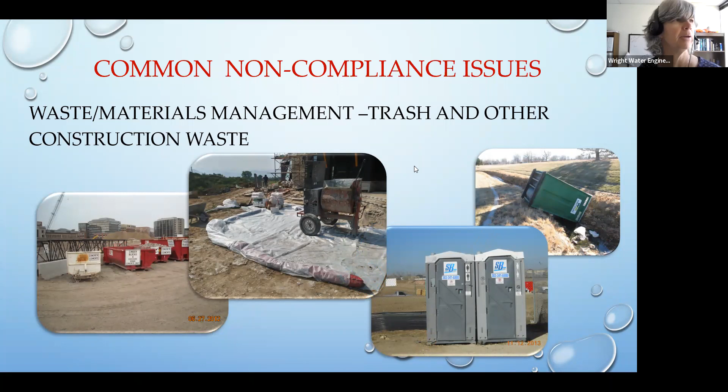I don't know about other people, but I've been struggling with custom home builders right now. I think it's because they haven't been regulated a whole lot in the past, to be honest, because they're not the national home builders. These are the ones building just this on a single lot—maybe it's a 35-acre lot, disturbing more than an acre—or they're part of a subdivision of custom homes, multi-million-dollar custom homes where the lots are only about an acre, but they're part of a common plan of development. So regardless, I had one that said, well, we're only disturbing 0.9 acres, and I said it doesn't matter because you're in the middle of this filing that's all being developed by different custom home builders. So you're going to have to get a permit, and it has been a struggle.

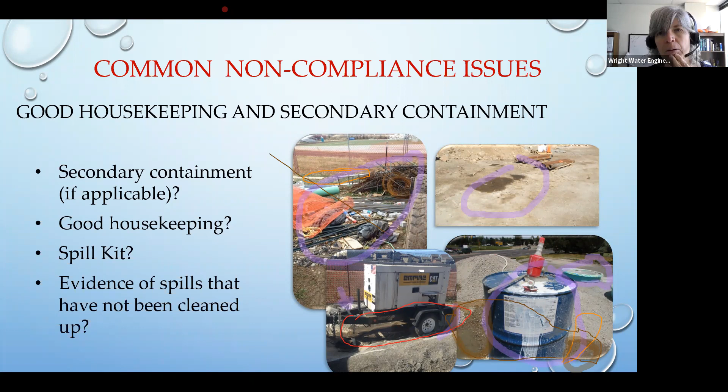Lack of temporary stabilization - somebody hit this when they were talking about inadequate control measures. This is a big one I've been hitting. I think this time of year, as inspectors, we need to be talking to our sites if they haven't been active in areas for more than 14 days. What is their schedule for seeding? And of course, it's not been super favorable with the dry weather we've been having, but we can't wait.

I think now some people do wait, I'll throw that out there, until the fall to seed, but then they need to do some kind of hydro mulching or something. You can't just leave it in a surface roughened condition from now until September. In my mind, that doesn't meet the good engineering, hydrologic, and pollution prevention practices.

So I love that people got this on surface roughening. This one's super hard - they did the right thing. You can kind of see the cleat marks are this way, but because of the way they did it, they've really got all of these up and down marks. And that's actually going to promote erosion. I would say the up and down the hill lines are more prominent than the contours.

Oops, sorry about that. There we go. So I agree, that's a good call on that one. That's where it's really tough because that contractor's trying - they just did not do it the right way.

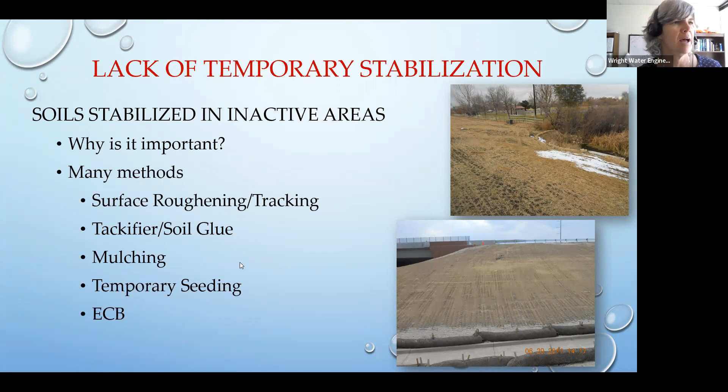So again, a detail could be really helpful there. Mile High Flood District has, and so does CDOT, a pretty good detail showing the equipment and the cleat marks. You can show them, yeah, it looks like you tried to do the cleat marks the right way, but whatever caused that to have so many up and down marks, you definitely don't want.

I had that conversation last week with a very prominent developer here in Castle Pines. They really tried to do the right thing and track, but it was the wrong way. I actually had to draw a picture because they just couldn't grasp what I was talking about.

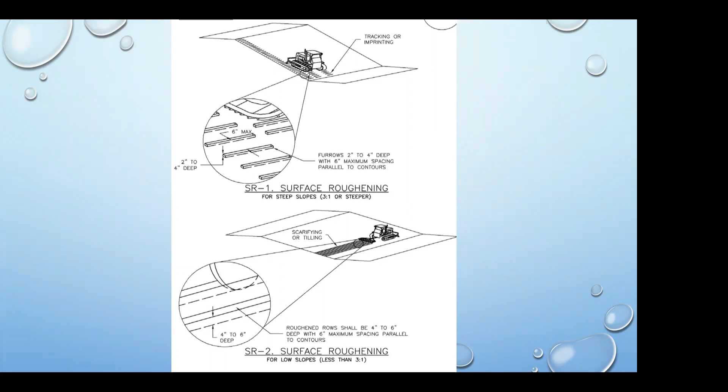No, I actually think a lot of people don't, and I think it is really helpful. I think a lot of us are also visual learners, and as soon as you see this picture, I think it kind of brings it home. These are the cleat marks, right? But you need to be careful.

What also does happen, which is not great, especially with bulldozer type equipment, is from the track you sometimes can get a line from the edge of the track. That's not the cleat marks, it's the edge of whatever holds that tracking on there - I'm sure there's an official name for it. So they have to be careful about that. But it's really important because they actually promote erosion if they do it the wrong way - it's the opposite of what you want.

Ideally, I kind of like if you can do it with some kind of tilling machine. This really only happens where I've seen it happen the most is oil and gas, because they go out there and often pay an agricultural person nearby to go out there and till it for them, even without doing the seeding, just to roughen it up.

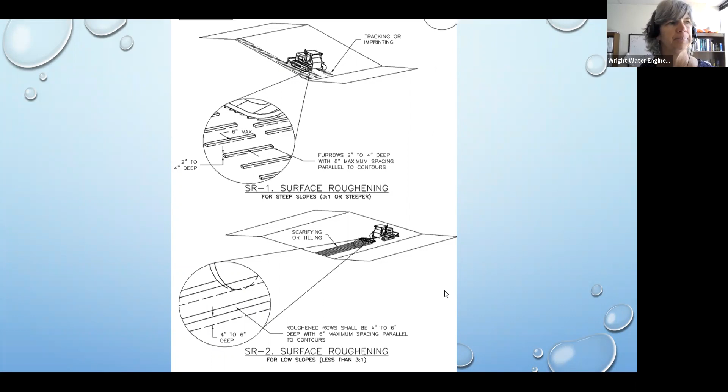All right, now we're going to jump into enforcement. Everyone has to have an enforcement program. You really need to know what your enforcement program is for your organization, because it is really different for many different organizations. For non-standards that might be joining us today, it tends to be a lot with your contract. So you want to make sure that you write that into your SOP or whatever you're using, your program description document.

But a lot of times you'll have contractual obligations. In addition, entities like CDOT, which is also more contract-based, have liquidated damages. So you may want to think about having something like that. You can certainly also close, do a stop work. The hard part about the stop work is just that it's your own project, but the contractor doesn't get paid for those days, so it's a delay for them. And I think that can happen, although I do think more frequently it's more done through the contract. So that's something for non-standards to really look at.

It's also something for CIP projects to be thinking about: what other mechanisms do you have? Because you can't always use the exact same enforcement for capital improvement projects as you do for private. For private, it's not the end of the world if it's stop work, but it's just different for a CIP because it's your own project. So it's got implications to the municipality as well. But that doesn't mean CIPs get to do what they want.

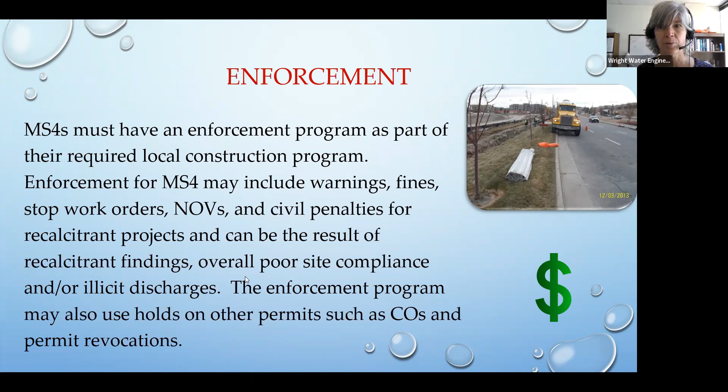What you'll find is contractors don't want to pay it, even a small amount, if they can avoid it. And how they avoid it is by being in compliance, or fixing things right away and getting photos, if that's what your program allows.

The other big thing with your enforcement program is you have to identify if you have chronic or recalcitrant violators. I wanted to spend a few moments talking about what is chronic first, and then we'll talk about recalcitrant, because they aren't the same. I know in some of our regulatory framework we see them listed together, but they're not always the same. They can be, and that's fine if they are, but they can also be separated.

For chronic, that's also really complicated, just like that whole thing about the non-standard language with 3 consecutive routine inspections having follow-ups. What does that mean? Do you mean if it's always the same item, or do you mean if you find new items each time? For chronic, I've been working with the Stormwater Council, and what we've come up with is there are 2 different types of chronic violations. One can be the exact same spot and the exact same control measure that's just every time out of whack, and therefore may need to be reevaluated whether it's the proper control for that location.

The second type of chronic is that the whole site just always has items. They might be different items, but you're always having a pretty negative report at the end, in terms of a lot of non-compliant issues every time you go out on the site.

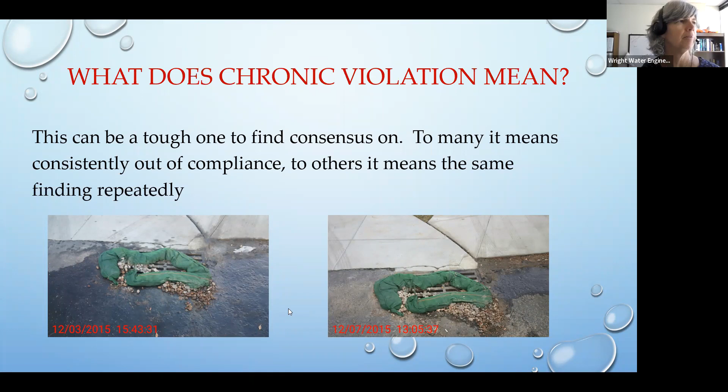Then you also have the site where every time you go, it kind of looks like this, right? It's just a mess. And it's not always the same location that's a mess, but overall, you can just know that you're going to find numerous items on your inspection report, because every time you go, the whole site is just not well cared for, not well thought out, and doesn't have appropriate control measures. So this might be a chronic violator also.

So when you do your inspections, you need to be identifying and looking for chronic violations. And if you are experiencing a site that has chronic violations, you need to start to escalate enforcement. Even if it's one area and the same location and the same control measure, it still gets escalated, and I tell people that right away. So like that rock sock, if I came back the second time and it's the exact same rock sock, I would say, I just want you to know this is now becoming a chronic violation. If I come back a third time and you haven't replaced this with some other type of control measure and the rock sock is here and it's broken, I'm going to have to write a notice of non-compliance, a notice of violation, whatever your program requires you to write. But again, it's that communication. Often when you have that communication up front, by the time you come back, you'll find that hopefully it's been replaced and it's not an issue.

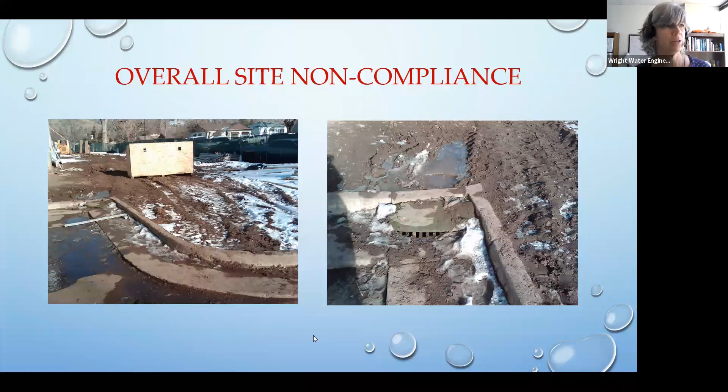So what's the difference between chronic and recalcitrant? Chronic just means that it's always out of compliance, right? Recalcitrant can also often be out of compliance, but it's also that they're not listening to what you're saying. They're not fixing what you've told them to fix. When you've identified a non-compliant item, they have not addressed it. That's recalcitrant. I've had a lot of sites that aren't recalcitrant, but they are chronic violators, and that's a little different. So you want to be careful in your wording, in that if they're not responding to your inspection reports, they're not addressing non-compliance, then they're recalcitrant. But if their site just always looks bad, or you have that one rock sock or a mud mat that really should not be a mud mat, that's chronic. A lot of times what we find with our recalcitrant players is not only are they not listening to us, they're also chronic violators, and the site's typically a mess. So often they can be recalcitrant and chronic. I've had quite a few folks that aren't recalcitrant, even if they are chronic. They've really been trying, but they're also only reacting to my inspection report instead of doing their own inspections and reacting to those. I've said to them, you're going to be a chronic violator if we keep going down this path. I know you always fix everything every time I come out, but every time I come out, I have a laundry list. And that's starting to meet that definition of a chronic violator.

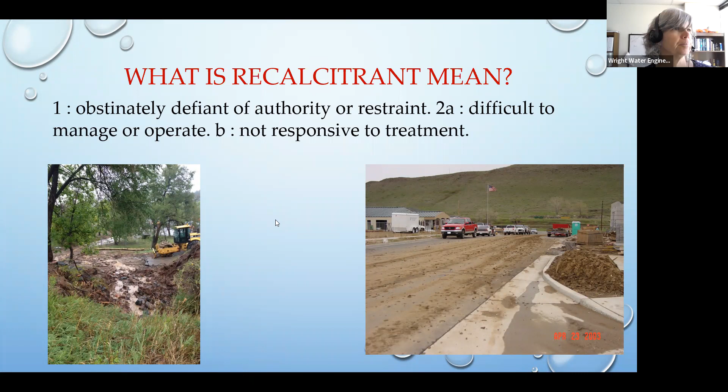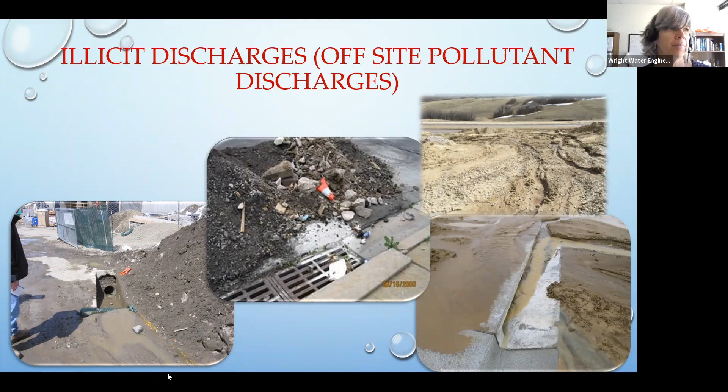So everyone has different stuff in their program. I don't know if anyone has anything to add.

I saw Jake on, and I really like Westminster's program, where if you get a notice of enforcement action, you can come in. Jake's with Arvada now, but when he was with Westminster he helped put together this program. Folks who got the notice could appeal and come in to speak to their case of why they shouldn't get it. But the enforcement action actually took into account what the cost would have been had they installed everything they should have, and then charged the contractor a fee for all the things they didn't install at the right time.

I thought that was a pretty great way to do it. They also had a mandatory hearing to speak to all of that, and they could appeal it again to try to plead their case, or go to the hearing and argue there was a big rain, a 5-year event, or whatever the case might be. They might get it reduced, but they still ended up with a pretty big fine.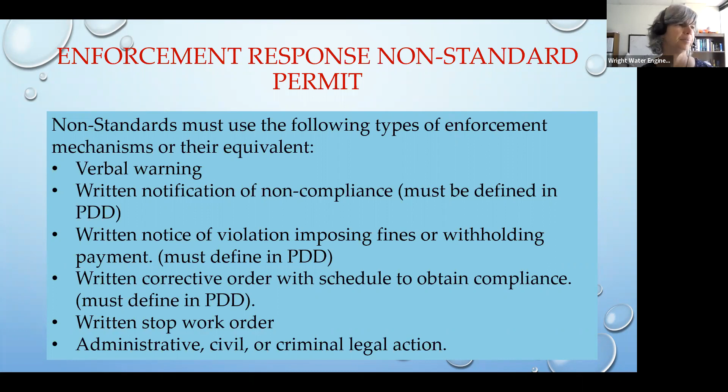This is also from the non-standard permit. So again, probably likely to see in the phase 2 permit renewal, is that it's very prescriptive, that you must escalate enforcement if non-compliance has continued at the site for more than 2 inspections. I actually don't have much of a problem with that piece, because I think most of us are doing that.

In fact, I think the 2 inspections would probably be more like compliance follow-up type inspections, and where it's escalating already, right? Like you go out there, and then after that first compliance re-inspection, if the item isn't done, you're already starting to escalate. And then if you come out there again and it's still not done, you're definitely moving into escalation.

But it does give the exception that, of course, if they've taken steps to minimize or prevent the discharge until an inadequate control measure is replaced or corrected or returned to working order, then that could be acceptable. The inadequate control measure must not have resulted in 24-hour reporting requirements. So those are the exceptions. That makes sense to me.

So for example, say you couldn't seed for some reason, they don't have the seed mix, you couldn't seed. So your contractor, the permitted contractor, comes to you and says, I can't seed. And you say, well, you're going to need to put down either hydromulch, surface roughening, whatever your program's going to want to have in place there until you can get it seeded. And then they give you a schedule for that.

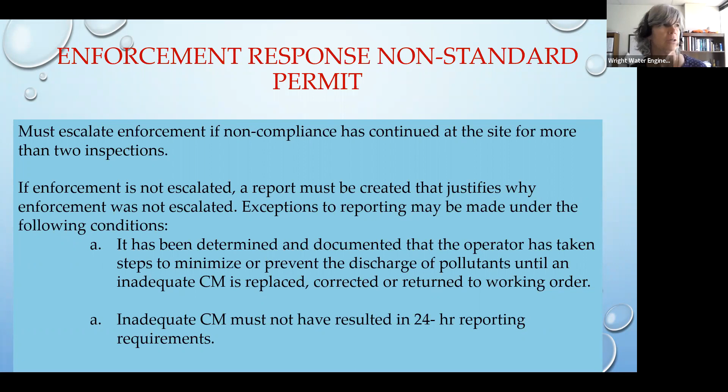And they haven't had a discharge that resulted in the requirement of needing to report it, because they had a discharge of pollutants into a waterway, then I think that does give you some leeway to be able to work with them on that. And that does happen. So good to know that's out there.

And then this is also new for the non-standard permit. So if the Water Quality Control Division, which is CDPHE, or an EPA inspection is done on a project site within your municipality or your MS4 boundary, if there's a written requirement for that permittee to respond back to one of those regulatory entities with a written report, within 30 days of being notified by one of those entities.

So the onus does go on to the regulatory agency to notify the non-standards. Then they'll ask the non-standards to review and provide any inspection reports for that area that they had. And then what they're going to look at is those inspection reports and determine if there should also be non-compliance with the local construction program.

Likely, but not always, there might have already been enforcement that was already started on a local level. And so you would want to convey that to these regulatory agencies. And again, this isn't going to be for every inspection that the division does, or CDPHE. It would only be for sites where they had enough findings that they're requiring the permittee to respond back with a written response.

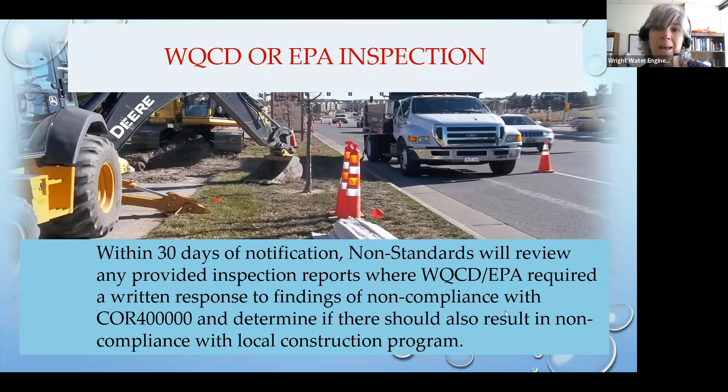I had someone, might have been in this class last week, or the CIP stormwater class, ask if you should walk the site whenever there's an inspection by EPA or CDPHE. I think this is another reason to walk the site. Again, you're not necessarily being evaluated, it's the permit holder for the CGP permit. But it's not a bad idea to gauge how many findings that regulatory agency is having, just to make sure you're thinking about it in terms of your own reports. Perhaps you'd even write up your own report after the walk. It's up to you, you don't have to, or maybe you go out the next day and do your own inspection. Just something to think about.

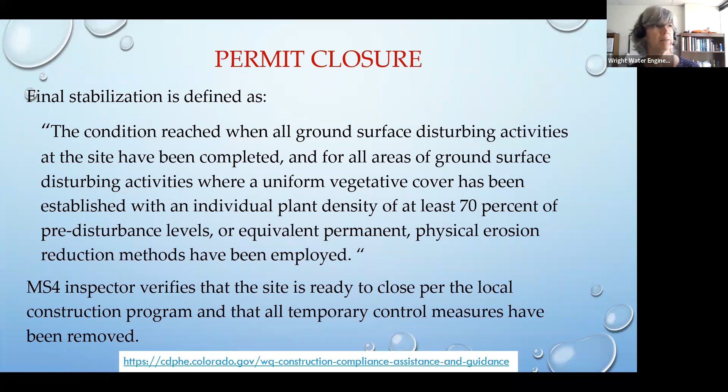All right, we're going into the last segment here, which is final stabilization. The big thing that has changed here - yep, right here - this is now in the non-standard permit. So for those of you thinking, in my phase 2 permit it still doesn't say this, so I'm not really enforcing on it - just know this is going to likely also be in the phase 2 permit. Final stabilization will be defined as providing at least 70% of what would have been provided by native vegetation in a local undisturbed area, or an adequate reference site.

Contractors have still not really caught on to this. The problem is a lot of times they might need to use an adequate reference site. For me, I tend to look at the surrounding area, and that can be the adequate reference site, but really they're supposed to state in their SWMPs what they're using as their reference site. So if they have things like prairie dogs, or if they're in a very industrial area that was road-based to begin with with maybe some limited vegetation, that's probably never going to meet the requirement of native vegetation in a local undisturbed area, and they should likely have used an adequate reference site.

I would highlight to you, this might be something you want to talk to your CIP managers about, because they definitely are going to want to be thinking of this. If they're having the contractor write the SWMP, they're going to want to think about this. If they're having the designers write the SWMP, they're going to want to make sure their designers are aware of this criteria, so they indicate if they're using an adequate reference site, and where that reference site is.

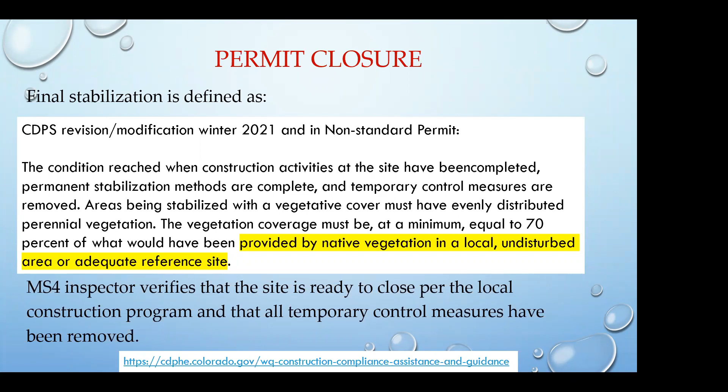And Jen, just to touch on another point, this is Ashley with Firestone. I think this is another instance where it's important for the MS4 inspector to be familiar with the program. This is also a really good opportunity for those programmatic documents to state what the MS4 program has decided to use, whether you're just going with 70% or a method of determining an adequate reference site, because if they start looking at your inspections to determine if they're adequate, it's going to touch more on the programmatic thing.

Yeah, that's a really good point, because a lot of people probably wrote their documents before this language came about, and they have that 70% of pre-disturbance, which in my mind is different than what this language from the permit is saying. And I do think that if you're in an area that's never going to be native representing...

I mean, it doesn't have to be native. Well, they indicate it sort of should be, but they just indicate it's the coverage that would be provided by native vegetation in a local undisturbed area. But they do, earlier, especially in the state CGP permit, talk about perennial and uniform.

But I think it's really important for inspectors that you are clear about what the expectation is here, so that you're feeling like you've met all the documentation requirements when you go to close out a site.

The other big thing when you do a closeout is to make sure all of the temporary control measures have been removed. There is a caveat for biodegradable, but a lot of municipalities that I've worked with are not allowing, even if it's biodegradable, the wattles to remain in place. And I am actually a big proponent of that, because those wooden stakes in this climate are not going to biodegrade anytime soon. And the netting sometimes biodegrades, sometimes takes a long time, and it does alter the local flow path. So really, if it's not needed, in my opinion, it should all be taken out.

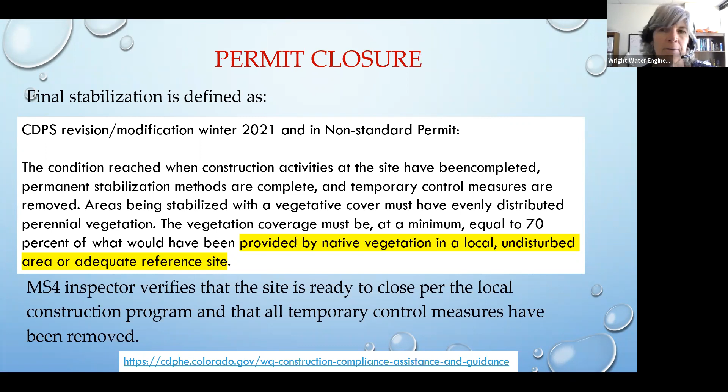Make sure you know all the different types of stabilization that could be used. Some of it is vegetative, some of it is hard surfacing. If you're having different methods that you allow in your community, make sure you know which ones you allow and which ones you don't. Some municipalities do not allow spray-on products. Some allow them with approval, but only with approval. So just make sure you know your municipality and what they require.

And then again, communication. Try to communicate to the contractor way before the seeding happens if you don't allow certain practices such as a spray-on product. Otherwise, you'll come out there and find hydro mulch everywhere, and they might have spent a fair amount of money and didn't understand they weren't supposed to do it. So I think, again, really try to communicate. It's not your job to convey all of your requirements, they should also be aware of them, but I think it really helps if you can try to be proactive in that.

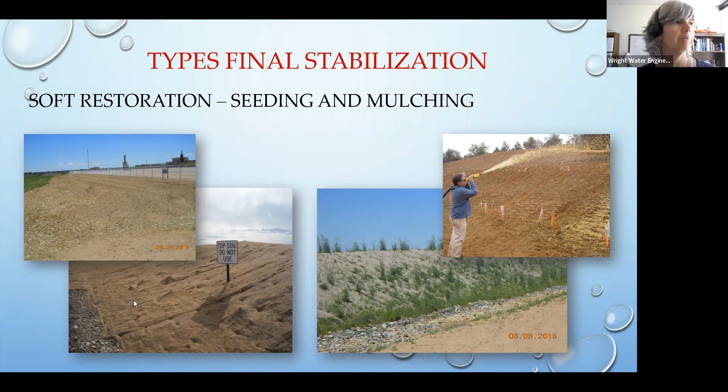These are just some of the things I've seen over the years: not implementing the stabilization in a timely fashion. I can't tell you how many people want to get it in before the snow flies, but then they're pushing construction and pushing their schedule. And then the next thing you know, it turns into December and frozen conditions, and they can't get it done.

Then they have to come back in the spring, but they didn't even meet the window of getting the hydromulch down. So it's just really problematic. That's where I try in September to start talking to people about when they're scheduled to seed, when is it going to happen, and just really emphasizing that they need to get that hydromulch down if they don't make the seeding.

The other big thing is if they are doing any kind of a spray-on product, and if your municipality allows hydraulic seeding, they really need to do that as a two-step process and not just combine the seeding and the mulch. Especially in this climate, you're probably not going to get good results, and it's going to be a big waste of money for everyone.

I personally am not a big fan of hydraulic seeding. I don't mind hydraulic mulch, but I'm not a fan of hydraulic seeding - I have not seen good results with it. So, again, if you're seeing that in your community, maybe you want to make a rule that you're not allowing it without approval.

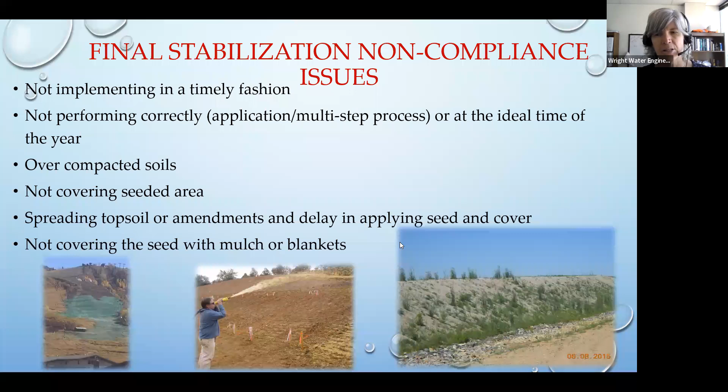All right, we'll move on to CIP. So these can be really tricky projects. And what you need to make sure is, how are they inspected? Is it the same inspectors that are doing your private? Are they different inspectors? Do they have the same level of training? I did an audit for a municipality where they had their right-of-way people who didn't normally do stormwater work, do CIP projects, and they just didn't have the proper training. And there was a lot of confusion between the contractor and the right-of-way inspector on who was doing what, because the right-of-way inspector is often taking daily inspections, but really of the right-of-way.

Yes, they'll throw in some stormwater stuff, but it's not on the proper form, nor is it the proper scope of an MS4 inspection. It certainly didn't meet the CDPS inspection, and the contractor thought they were responsible for all inspections. So it's really important you're having those communications up front.

Also, something that can be really hard is sometimes the MS4 inspector has to wear not only the MS4 inspector hat, but sometimes they have to inspect it for the state, and that can be really challenging. I really highly recommend that not happen, because if you're aware of non-compliance, you actually put the construction program in jeopardy unless you're also documenting it there and enforcing and escalating per that program. So I really think it's a better idea not to do it.

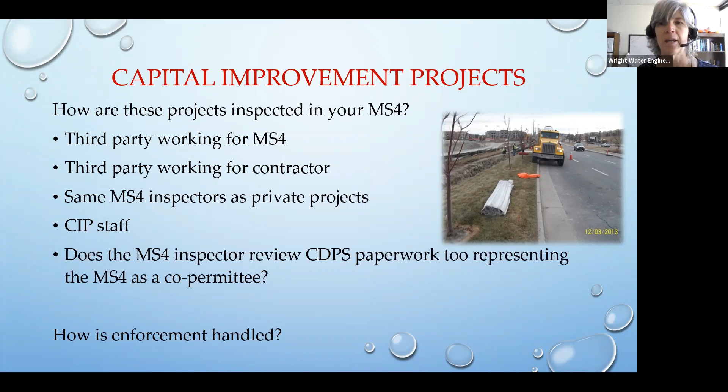Just make sure you're communicating and doing your best to do that, even if others are not. Capital improvement projects are challenging. Again, I think if you can get in front of them as much as possible, it helps, by introducing yourself, especially if you're there at the beginning of the project, and talking about expectations at the very beginning and what your role is. Your role is not as a CIP manager, it's as the oversight construction compliance person.

The other thing that's hard, just be careful when you are an inspector, especially for those of us who have come from a consulting background. Sometimes we want to help them and totally say, this is what you need to do to make your site compliant. You can give some assistance, but you want to be careful about how far you go.

Just like that quiz question about how much silt fence do I need? If you went out there and said, oh, I think you need like 30 feet, and then they install it, and you inspect it and say, well, I'm sorry, you needed more like 50 — who's going to get the finger pointed at them? It's going to be you, right? So you do have to be really careful there.

So I think you can be a compliance assistant for sure. People don't always know how to measure this, and you have to help them understand where they would look for resources, who to go to, that there are people who actually get paid to install the silt fence correctly. Maybe you could give them a couple of people you know about. I would avoid giving one name. I always try to give at least 3 names when people ask me what kind of firm does this work. And if you're a consultant, never your own. So that's important out there.

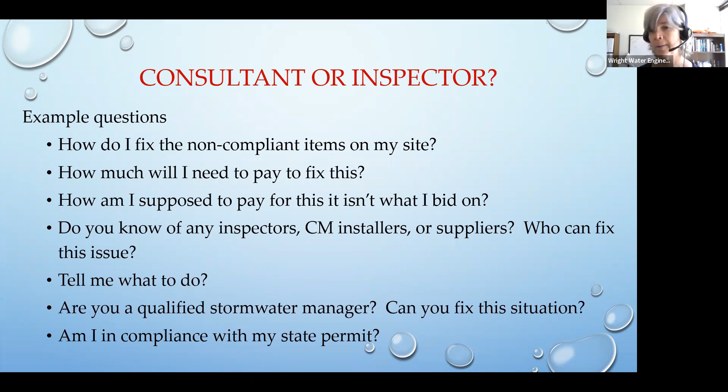Sometimes people will ask you, hey, thanks for that inspection, you said I looked pretty good, how would I do in a state inspection? You're not a state inspector, you are a municipal inspector, and so you can only say from your perspective of your program how it looked. So just be careful not to overstate.

So the goals of the MS4 construction program are to minimize negative impacts. We can't 100% eliminate them, I wish we could, but when it rains we're going to have probably some amount of sediment that does leave. The idea is that we're not going to have muddy water, right? It's going to be sediment that is very minor and representative of what would leave when it wasn't under construction.

We also want to make sure that we're communicating not only to the people in the field but also to other people that we work with, if that's the case. Even if you're a solo show, you might be talking to your public works director, engineer director, or community development director if you're having issues out there. And if you do work with a lot of other inspectors, make sure you're being consistent with your program and how you're implementing it. So I think that's always a good idea.

I encourage you to talk to other inspectors, come to that construction committee meeting, get with Ashley, she'll get you that information. It's a great place to bounce things off each other. Especially as we go into the phase 2 permit renewal, or for non-standards that are now taking over their own programs and doing their own MS4 construction oversight, make sure you have other resources to bounce things off of to understand what the expectations are and what's working and what isn't.